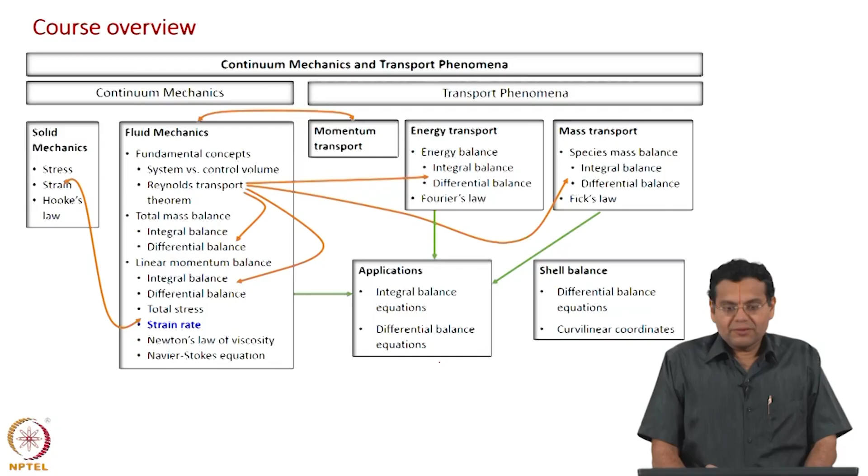We have derived the linear momentum balance and are proceeding towards the Navier-Stokes equation. To understand the surface forces on the right hand side, we went to solid mechanics, understood stress, came back to fluid mechanics, understood total stress, completed the differential linear momentum balance, and realized the viscous stress tensor components are unknowns. They ought to be related to velocity gradients. To understand velocity gradients, we need to understand displacement gradients. So we went through this double headed arrow to solid mechanics, discussed strain, and now we are coming back to fluid mechanics to discuss strain rate. Okay, that is where we are.

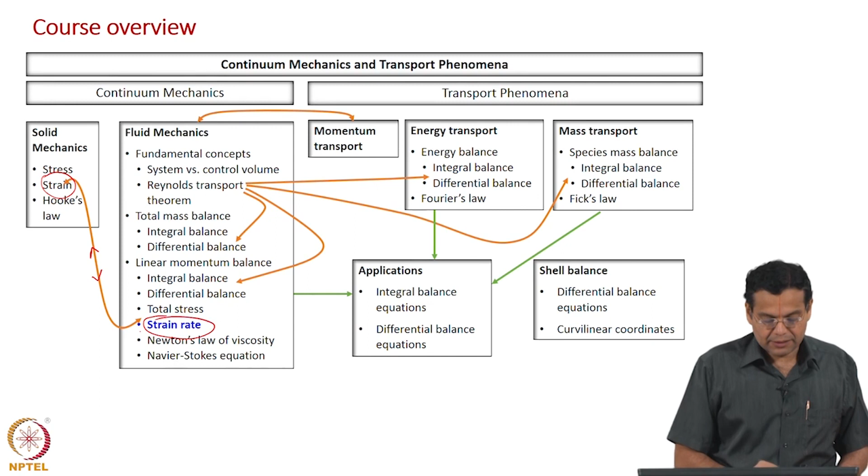In terms of our journey to the Navier-Stokes equation, we derived the differential form of the linear momentum balance with viscous stresses on the right hand side. They need to be related to velocity gradients. To understand velocity gradients, we first understood displacement gradient by taking a diversion to solid mechanics, and discussed these two blocks: strain, displacement gradient, strain tensor, rotation tensor, etc. Now we are going to analogously discuss these two blocks for fluid mechanics. The highlighted two blocks are going to be discussed now.

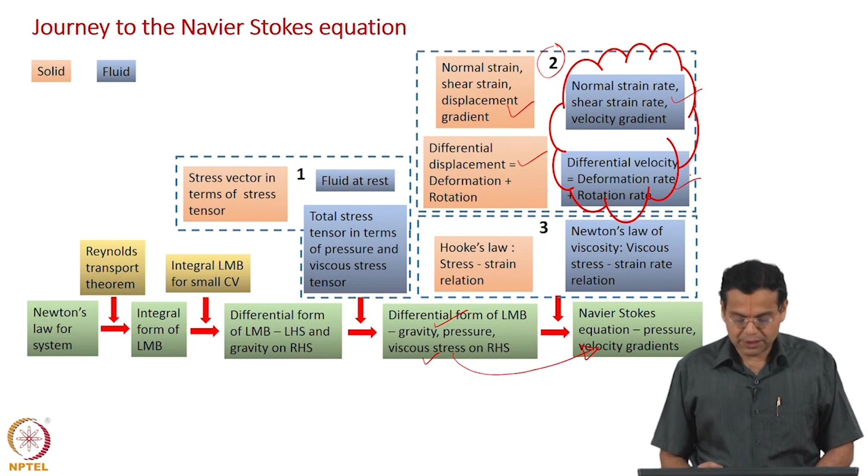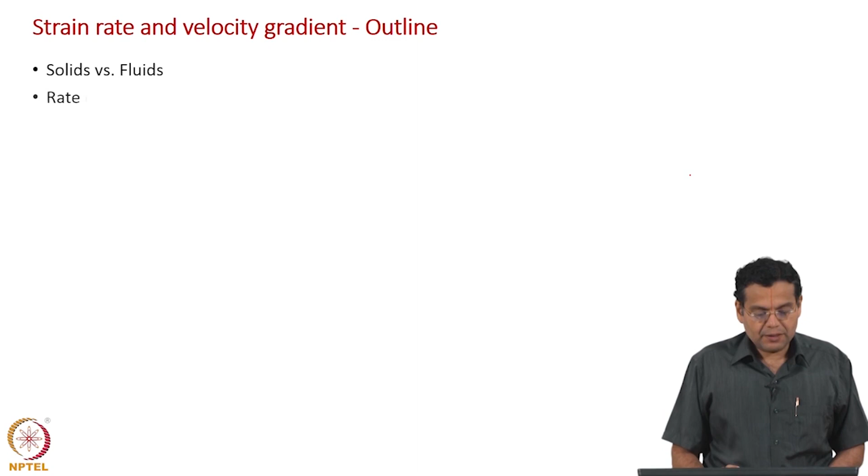Okay, what is the outline? We discussed the difference between solids and fluids after our first visit to solid mechanics. When we came back to fluid mechanics after our first visit to solid mechanics, we discussed the difference between solids and fluids. So once again now we are coming back to fluid mechanics, so we will discuss the difference between solids and fluids. It will be a revision, but we will highlight one particular aspect there. The topics which are going to follow are analogous to what we discussed under strain when we discussed solid mechanics. There we discussed deformation, normal and shear strain. Here we are going to discuss rate of deformation, normal and shear strain rate.

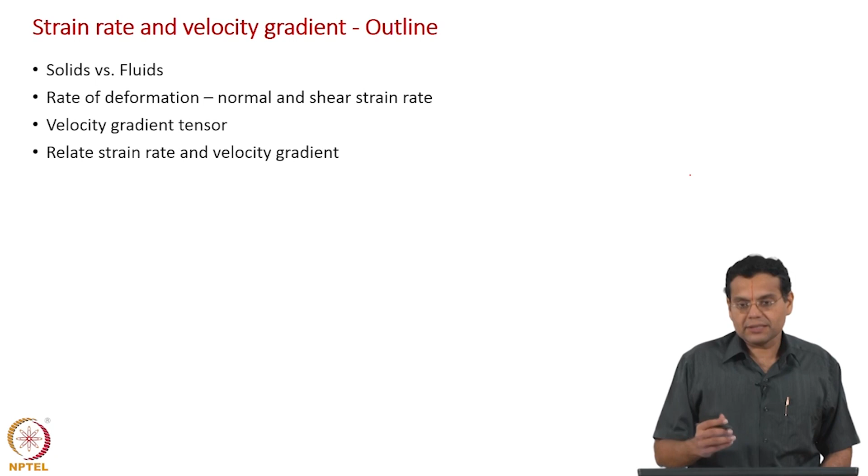There we discussed displacement gradient tensor. Here we are going to discuss velocity gradient tensor. Then we related the strain and displacement gradient. Here we are going to relate strain rate and velocity gradient. And there we expressed the displacement gradient tensor as sum of strain tensor and rotation tensor. Analogously, here we are going to express the velocity gradient tensor as sum of strain rate tensor and rotation rate tensor. So these four topics are almost analogous to what we discussed for strain in solid mechanics.

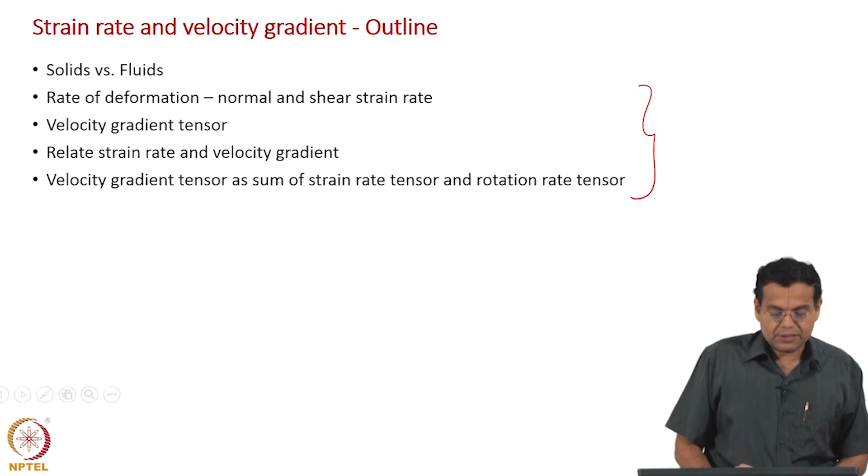Then we went on to discuss the difference between solids and fluids from a mechanics point of view, and that is what this slide is about. When we apply a tangential force to a solid, it starts deforming and continues to deform until the internal stresses balance the external applied tangential force, and then it stops deforming. That is what is shown here: an undeformed state and a deformed state. So it goes from one equilibrium state to another equilibrium state, and then stops deforming. So solids can resist shear stress under static condition, shown here as d c initial state, d dash c dash the final state. If you remove the tangential force, the solid goes back to its original state.

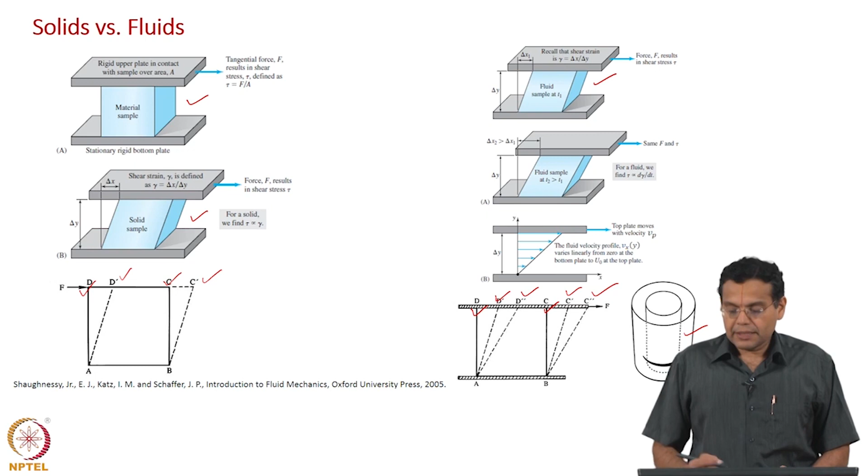We also saw an animation to show that fluids deform continuously. This is a flow between two parallel plates. The bottom plate is fixed, the top plate is set to motion at a constant velocity Vp, and the velocity profile is linear.

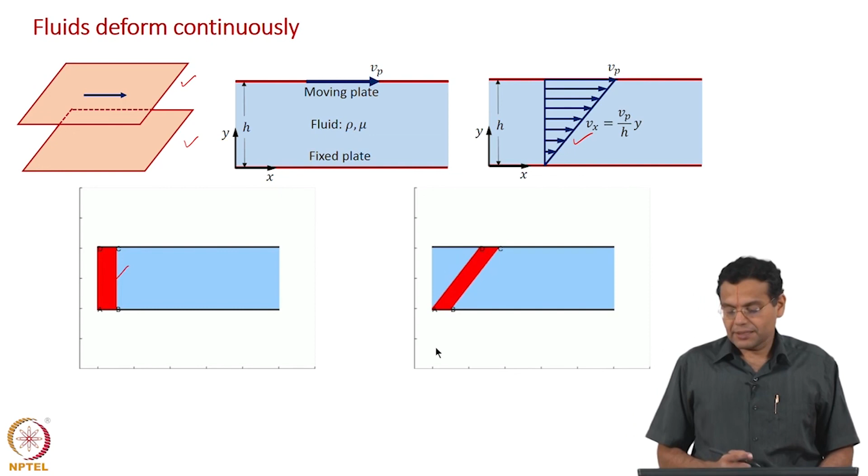We have come across this several times. We identify a region of fluid, and if you focus on that region, we can easily see that it continuously deforms. As long as the plate is moving, this region continuously deforms, and that is what we say: fluids deform continuously. The animation shows that this region continuously deforms. Of course, it replays back, but otherwise it deforms continuously.

Now, this table highlights the differences from a mechanics point of view, which is of present interest to us. What are the differences? Response to shear stress: the key difference is that solids resist deformation, fluids resist rate of deformation, as we have seen — the cylinder example is the best example to understand this.

In one case the force depends on deformation, in the other case the force depends on rate of deformation. We already discussed this earlier: ability to resist small tensile stress, and compressibility.

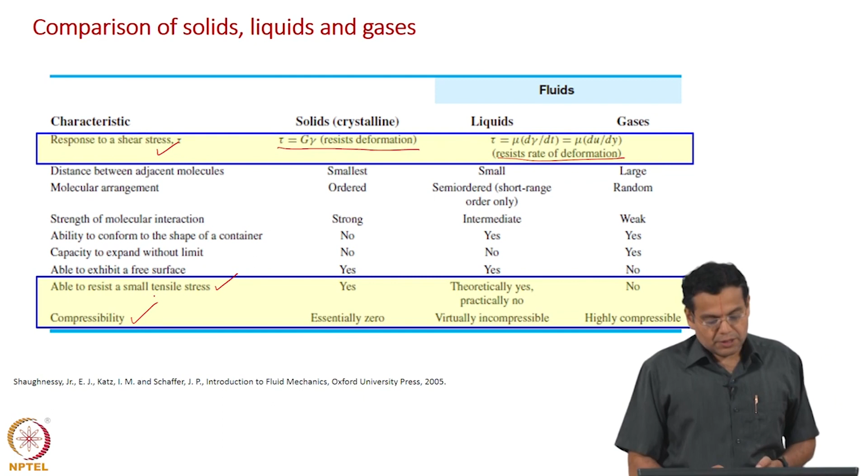So now let us summarize all the differences between solids and fluids. Solids resist shear stress under static condition, fluids cannot resist shear stress under static condition. Even for a very small shear stress, they cannot resist it under static condition. Solids reach an equilibrium stage and stop deforming, fluids deform continuously, and so we say fluid flows.

When the tangential force is removed, solids regain their original shape; fluids do not return to their prior shape. Now, the major difference which is of importance to us for the present discussion is that for solids, force depends on deformation, while for fluids, force depends on rate of deformation.

When we discussed stress for solids and then came back to fluids to discuss total stress, we took lead from the first difference, and said fluids under static condition have some stress, and when they flow they have additional stress, and so on. Now, the difference relevant to us is the last one, and that is why it has been highlighted — earlier it was the first difference. Now the last difference is highlighted, and we are going to take lead from this: force depends on deformation for solids, force depends on rate of deformation for fluids.

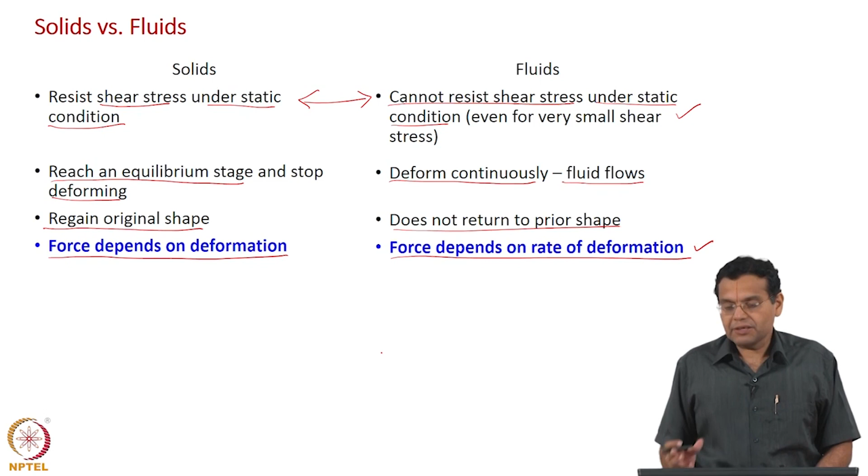Based on this difference, we can intuitively write this table. For the case of solids it is deformation, for the case of fluids it is rate of deformation, and for solids it was translation, rotation, normal strain, shear strain. We just now have to discuss all this in terms of rate. So we have translation rate, rotation rate, normal strain rate, shear strain rate.

In the case of solids we had displacement field, displacement gradient. Now in the case of fluids we will be having velocity field and then velocity gradient, and then we related the normal strain to the displacement gradient. Now we are going to relate the normal strain rate to the velocity gradient. We are going to discuss this in further slides in detail, but based on the fact that force depends on deformation for solids and force depends on rate of deformation for fluids, we can come up with this table.

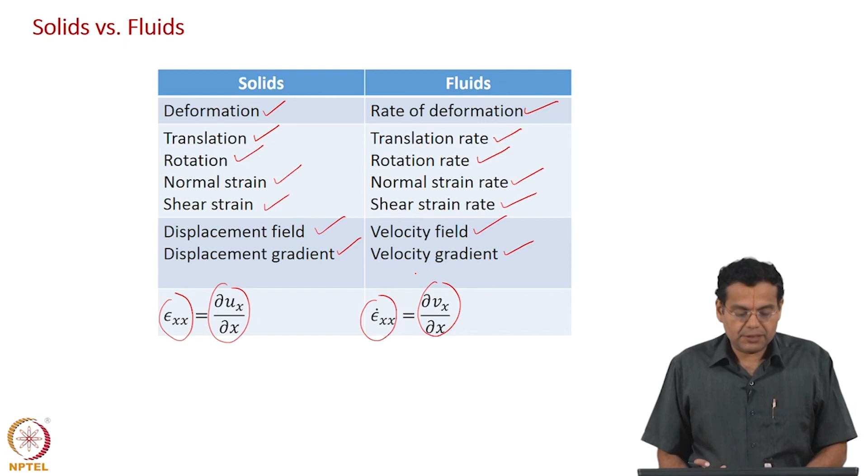Now, the way in which we are going to discuss the order of topics are all going to be analogous to what we discussed for strain under solid mechanics. So some will be recall slides and others will be new slides for fluids.

So this is the recall slide where we defined normal strain and then shear strain. For normal strain, it is change in length by original length. At a point we take a small line element along direction n, and the change in length by original length gives the normal strain. For the case of shear strain, we take two perpendicular line elements and then look at the change in angle between the initial state, which is pi by 2 radians, and the final state. Of course, this also we consider at a point with two very small line segments which are perpendicular to each other.

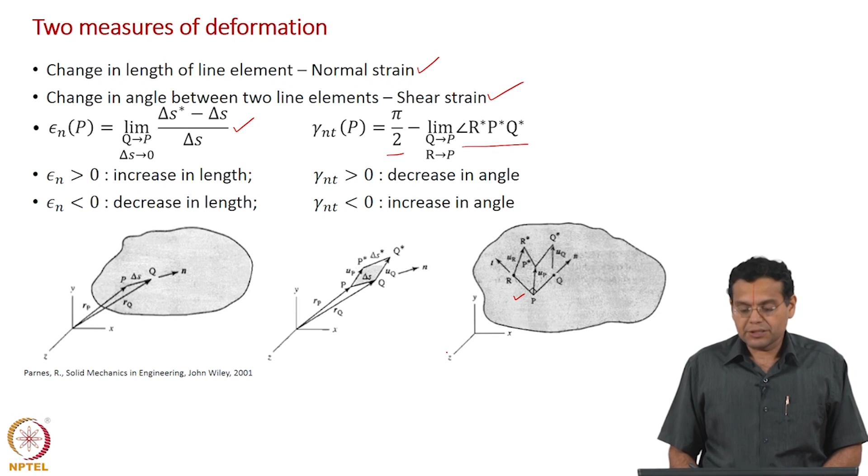A normal strain greater than 0 tells increase in length, less than 0 tells decrease in length, and if the shear strain is greater than 0, it indicates that the two lines have come closer to each other, meaning there is a decrease in angle between them. If the shear strain is less than 0, then there is an increase in angle between them.

Now we will analogously introduce two measures of rate of deformation. Earlier it was two measures of deformation. When we discussed solid mechanics, we said there could be change in length and change in angle, quantified in terms of normal strain and shear strain. Similarly, here for the case of fluids, we are going to discuss normal strain rate and shear strain rate.

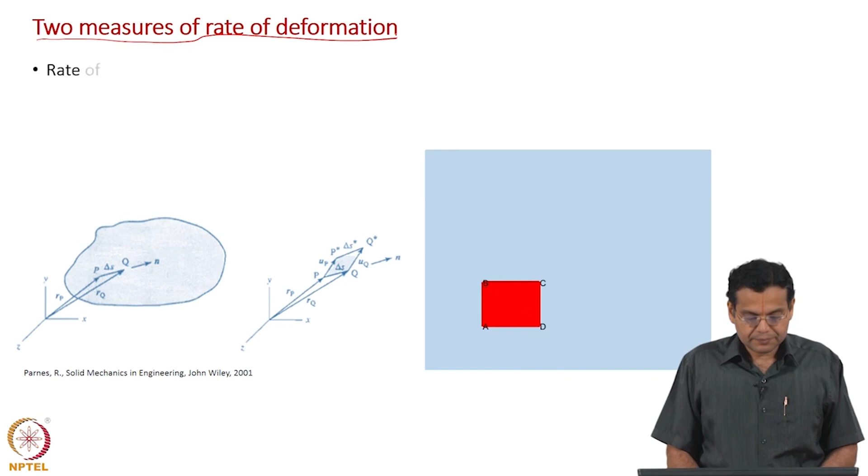This slide is for normal strain rate. So how do we define normal strain rate? Earlier we have seen strain defined as change in length of a line element. Now it is rate of change in length of a line element, normalized by the length. So rate of change in length of line element is the normal strain rate. How do you express this formally?

This part of the definition is same as normal strain, which tells about change in length by original length. Now we need to express it in terms of rate of change of length. So the numerator tells change in length, divided by delta t gives rate of change in length, per original length. Now we have two limits. The first limit is, as we have seen already, at a point we consider a small line element, so delta s tends to 0, and then we are divided by delta t, and the rate is defined in the limit of delta t tending to 0. So that is why you have another limit here, which tells delta t tending to 0. So one limit makes the definition of normal strain rate valid at a point, that is why delta s tends to 0.

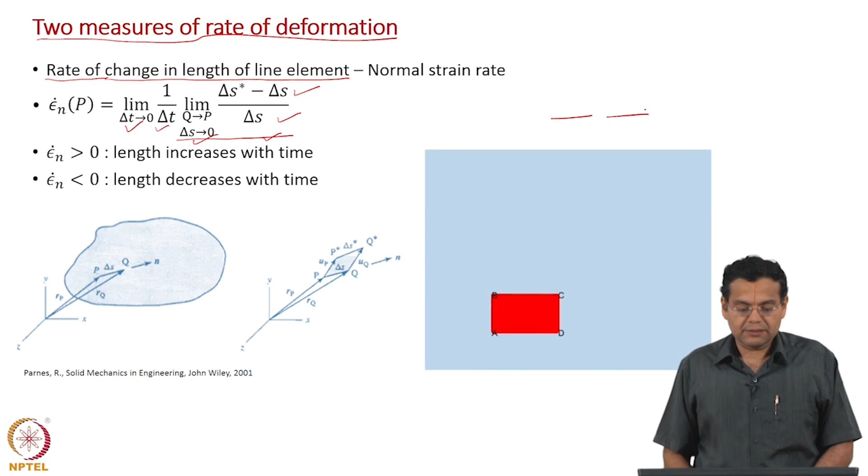And that is what you see here. The length of line segment AD keeps increasing, length of line segment AB keeps decreasing. Okay, so now let us define shear strain rate. How do you define it?

Earlier we said change in angle between two line elements. Now it is rate of change in angle between two line elements. So let us see how to formally define the shear strain rate.

The terms within the bracket are the same as what we have seen earlier for the definition of shear strain, and now we are interested in the rate of change of that. So divide by delta t and then let delta t tend to 0.

And once again we have two limits here. The first limit tells that at a point we consider two line elements which are perpendicular to each other, so that makes the definition of the shear strain rate valid at a particular point. And we have another limit, delta t tending to 0, that makes the definition of shear strain rate valid at every instant of time.

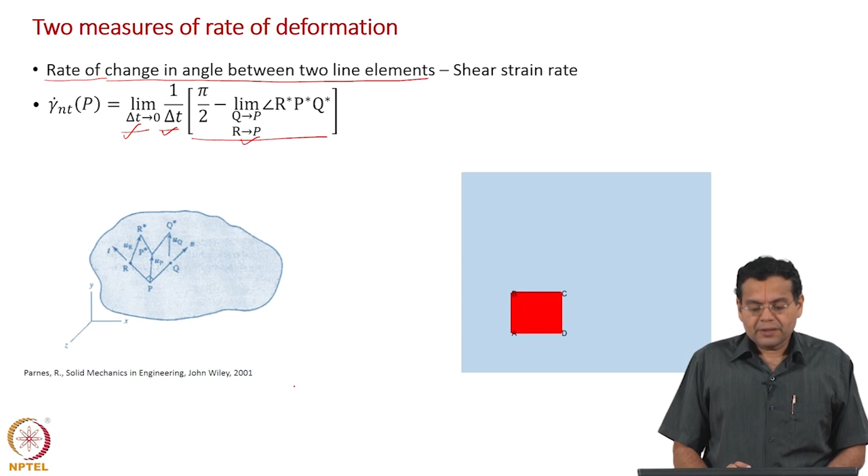Okay, we always, in the case of solid mechanics, need a definition which is valid at every point, but now we need a definition which is valid at every point and every instant of time.

Let us look at this animation where initially the angle BAD was 90 degrees, and now the angle between AB and AD decreases, they come closer to each other, and the rate at which this angle changes is what we mean by shear strain rate.

I'd like to mention that the way in which you understand shear strain rate is that we consider two line elements, let us say at some time t and some other time t plus delta t, the two line elements become like this, they come closer to each other, and now the rate of change of angle is the shear strain rate.

What does that mean? Pi by 2 was the initial angle, and then the final angle was whatever angle is between these two line elements, and the rate at which this change happens in the limit of delta t tending to 0 is the shear strain rate.

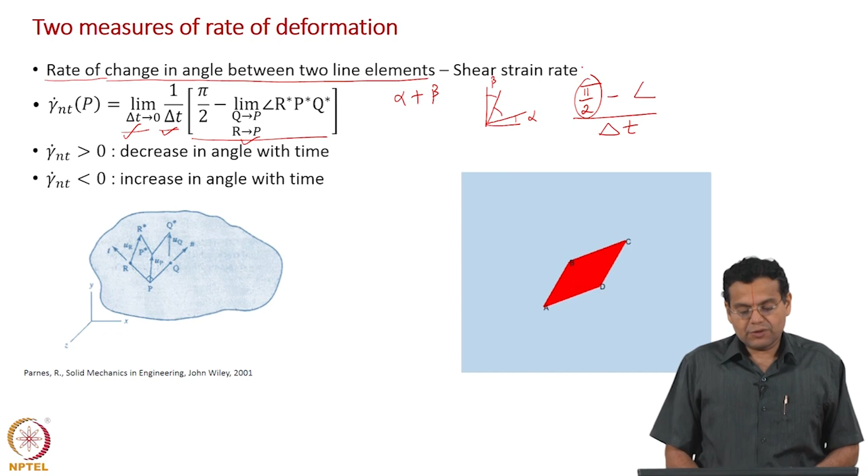Whatever we discussed for solids under static conditions, now we are discussing as a rate.